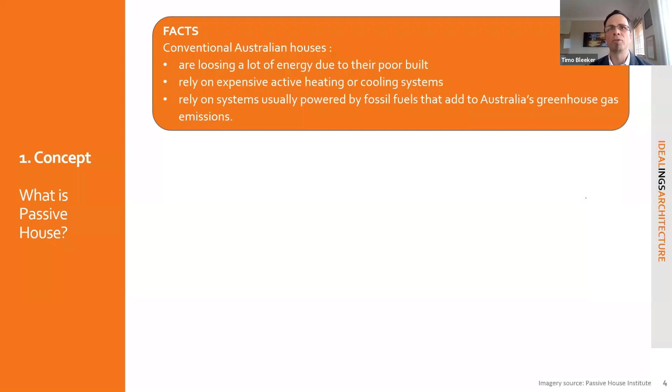Let's carry on. What is passive house? Let's have a look at some facts first. Conventional houses in Australia often lose a lot of energy due to their poor build and rely on active heating and cooling powered by fossil fuels that add to Australia's greenhouse gas emissions.

Let's have a look at the principle of a flask. A flask is a solution to keep coffee or tea warm, or any drinks that you might like, without using any active energy. A coffee machine, on the other side, needs active energy to keep the coffee warm. So passive house, you can sort of imagine it being similar. It wants to have an outer envelope that basically insulates the interior and keeps the energy that we apply to it inside without much further active energy.

I always remember the quote of a former colleague of mine I worked with for a while. He was saying, let's all live in a thermos flask and then we are all good. Not quite like that, but it's somewhat like that.

Passive house is a solution that is applicable to buildings of all classes. So it's not just class 1 residential buildings. It applies to all class 1 to 10. So you can even do your shed in the backyard, if you have a bit of a workshop there, as a passive house if you want. So it applies to everything, to schools, to hospitals, to office buildings, you name it.

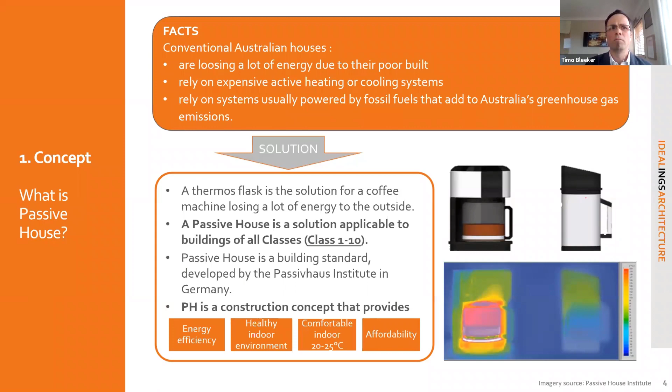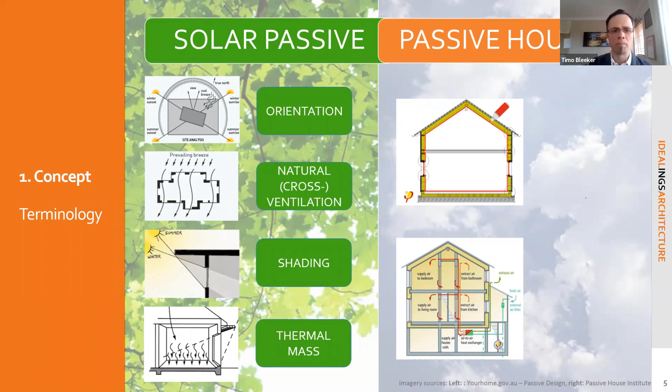Before we look further into the passive house principles, let's have a look at the terminology for a second, because there's often quite a confusion between solar passive and passive house. Solar passive has core principles to it. I'm just looking at the four main ones here, which are orientation, natural ventilation, shading, and thermal mass. Passive house does take that into consideration as well, but they lay a lot of emphasis on the building envelope and on the 24/7 fresh air supply.

You might say the natural ventilation and the fresh air might be somewhat the same. It's not quite, because natural ventilation depends on the occupant actively opening windows and doors to actually let fresh air in, or what we often find is louvers that are permanently open or operable to get fresh air in. But what about those days where it's too hot or too cold, or where we don't want that outside air to come in? That's where the fresh air supply of the passive house principles comes into play. But we look into that a little bit further down the track.

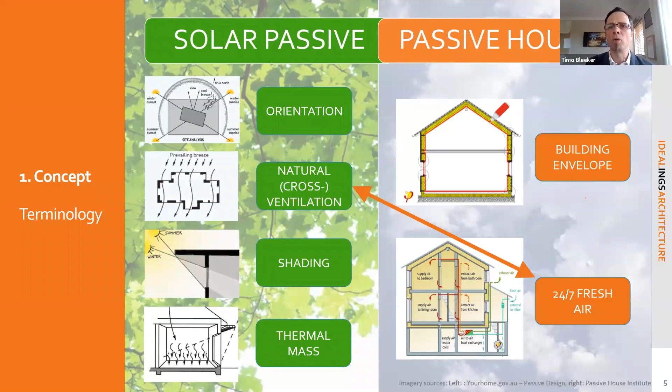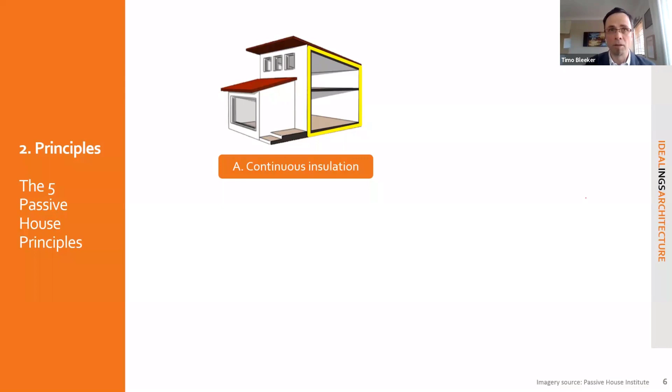The 5 principles at a glance. The first one is continuous insulation. So we need proper insulation to avoid wastage of cooling and heating energy to the ambient outside air, and it needs to be a constant layer all around. High performance windows. Windows are often the weak spot in the envelope, but we can't just treat them like holes in the wall. These windows still need to have a performing value, so we need to address that, so these windows add to the continuous insulation layer.

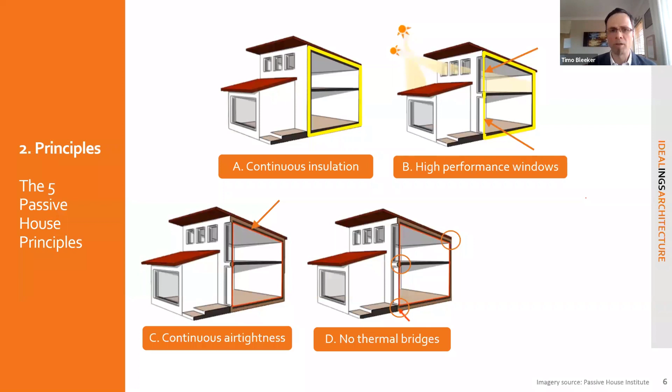Airtightness, to prevent the moisture that sits in the indoor air getting into the structure and creating damage to the building structure, and to avoid getting unwanted and uncontrolled air in from outside, so getting drafts, etc. No thermal bridges, to avoid health issues for the occupants, and avoid gaps in the outer envelope where the cold could come in and provide cold surface temperatures and condensation and mold issues.

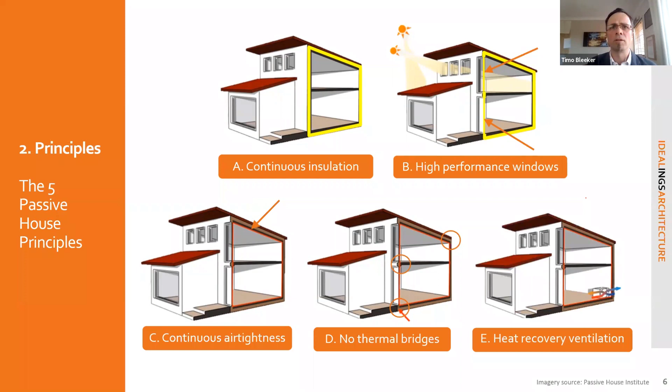And the fifth and last principle is heat recovery ventilation, which is often called the lung of the passive house. But let's look at all of those principles one by one, starting with the insulation. Some facts at the beginning.

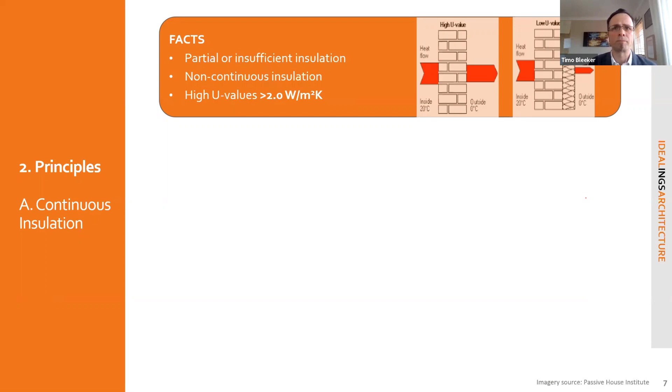So we want the insulation installed as a continuous layer, as highlighted before. So that yellow line here needs to be continuous, even in the tricky bits where the roof meets the wall or the roof cappings or at the footings, etc. So we want to look at those details that achieve a continuous layer.

With low values, U values as low as 0.3 watt per square meter Kelvin. Mind you, that's for Perth. In other cities or other locations, that might be a different value. In colder climates, sometimes underslab insulation is needed, as you can see at the yellow dotted line here, especially maybe the Melbourne and Tasmania region, certainly the northern European region. We usually have underslab insulation.

And keeping the heat in and keeping the heat out works in both directions, obviously. In winter, the insulation keeps the heat in, and in summer, it keeps the heat out where we want it. Or look at it the other way around. In summer, the air-conditioned air stays inside.

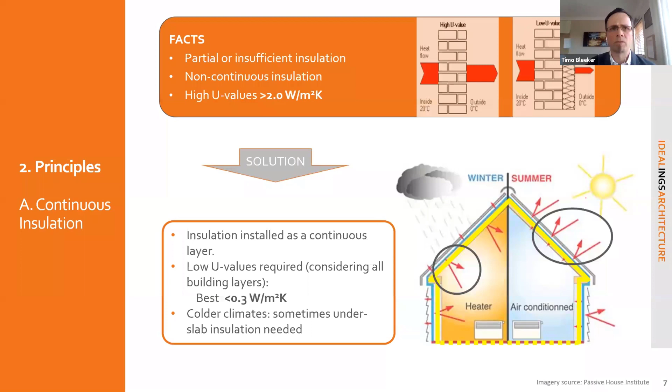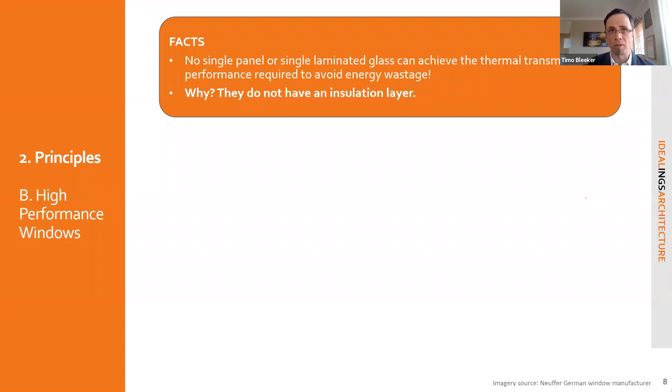The second principle is high-performing windows. So no single pane or laminated glass can achieve a thermal transmittance performance required to avoid energy wastage. Why is that? Because they don't have an insulation layer. It's basically just a pane of glass or two panes of glass that are laminated to each other that don't have an insulating capacity. The thicker the glass becomes, it might take a little bit longer for the heat to go from one side to the other side, but it's basically just a material that conducts heat.

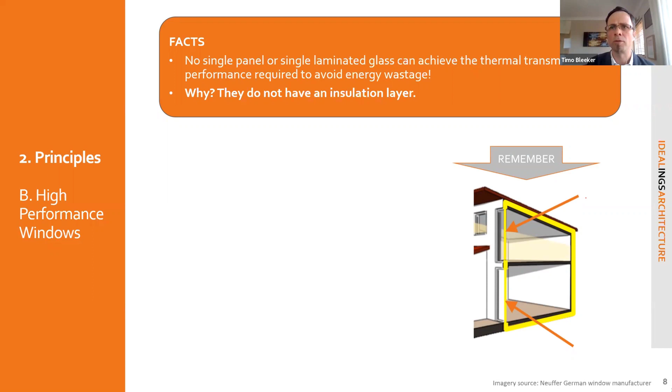Remember, we don't want those windows to just be holes in the wall. They need to have a thermal performance to close the loop of the thermal insulation. So what we want is the windows must have double glazing, because the cavity in between is the insulating bit and usually has a gas infill, and that gas has a thermal property. So that's basically the main element that thermally insulates the window or the glazing.

And these yellow and red highlighted bits basically need to be a continuation of that outer layer of the yellow line that we've seen before. It needs to meet the wall insulation at the top of the window and needs to meet the wall insulation at the bottom of the window. So with single pane glazing, this won't be achieved because there is no insulation there.

So we need that gas infill, so minimum double glazing, plus low conductivity spacers. The spacers are the ones that keep the two glass panes apart, and thermally broken frames, or even insulated frames. So all those yellow highlighted bits there are the insulated or thermally performing elements. If you've got a thermally unbroken frame, as we often find with aluminium frames, then you've got basically a thermal bridge there, where the inner surface gets really cold in winter and hot in summer, and you lose energy there.

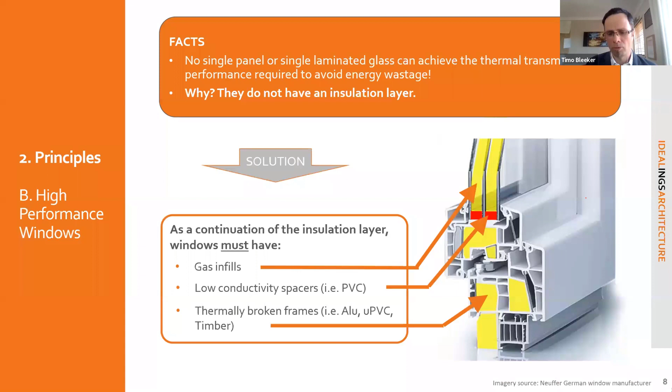Third principle, airtightness. Currently, a typical Australian home has around 15 air exchanges per hour. What does that mean? That means that every 4 minutes, the entire air volume of a building is completely exchanged. I repeat that. Every 4 minutes, the entire air volume of that building is completely exchanged, and with it, also the cooled and heated air or energy that we just applied to it.

How do we measure that? Airtightness is measured at 50 Pascal. That means there's a pressure difference that simulates a situation that is around 17 knots or 20 miles per hour. This is, just to picture it, a situation where small tree leaves or branches start to sway a little bit, or where waves on the ocean start to get those little white crests, but just the start of it. So it's a pretty common weather situation.

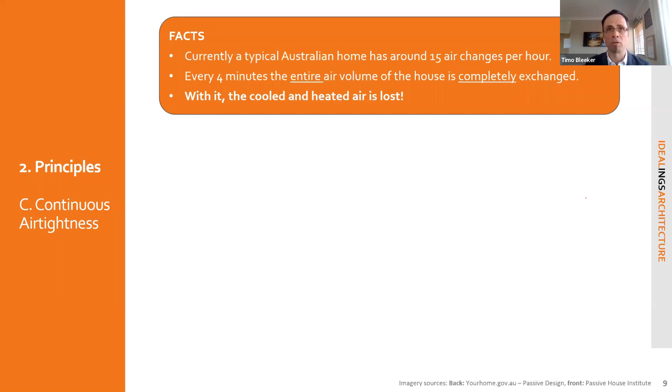Under this situation, a current typical home has 15 air exchanges per hour, so every 4 minutes. Passive House wants 0.6, so that means every 1 hour 40 minutes, the entire volume is exchanged instead of the 4 minutes that we are facing here.

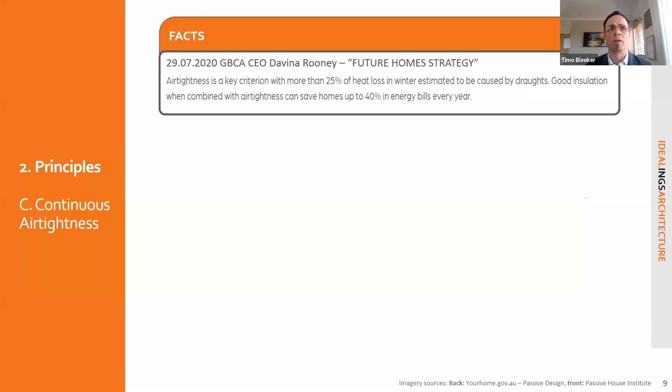Just a quick quote from Green Building Council CEO Davina Rooney. They released about two weeks ago the Future Homes Strategy, and I'd just like to quickly read that here together with you. So airtightness is the reason for 25% of heat loss, and it's estimated to be caused by draughts. So good insulation, when combined with airtightness, can save homes up to 40% in energy bills every year. I'll just leave this statement as it is for now, and come back to that home strategy a little bit later again.

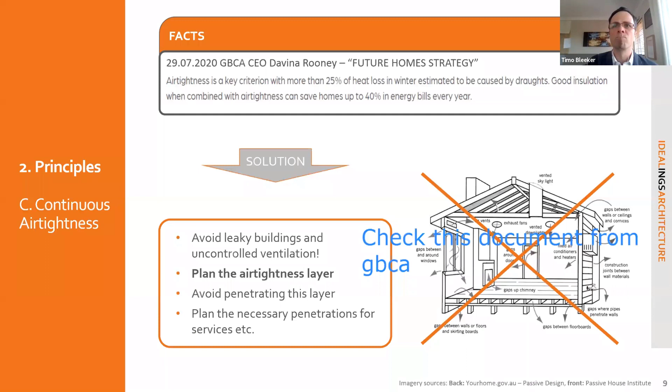So we want to avoid leaky buildings and uncontrolled ventilation, as you can see here on the right. Leaks can be everywhere, basically: around the windows, air vents, exhaust fans, your power switches, your power points, etc. So this is uncontrolled ventilation, where drafts also occur. We want to plan the airtightness layer, which you can see here in the red line, all around the building, and avoid penetrating this layer.

The airtightness layer in our local climates here, I'd say Perth, Sydney, Melbourne, Tasmania, should or must be on the inside of the insulation. In more tropical areas, it might be the other way around and needs to be looked at on a case-by-case basis. But for simplicity, let's just say it needs to be on the inside of the insulation layer. Therefore you need to avoid penetrating this layer and plan where you need to penetrate it for services, etc., or how it comes together on joint details like wall to roof or wall to floor details, etc.

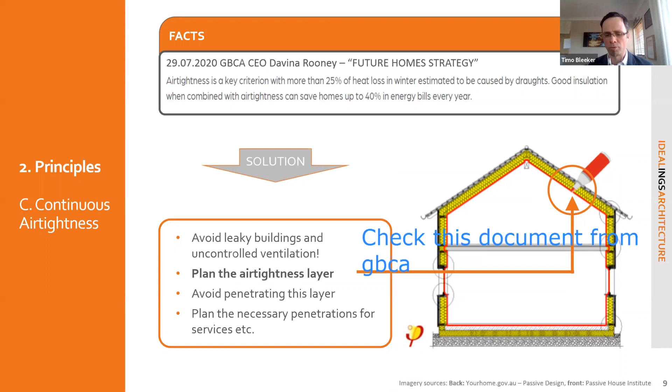The fourth principle is avoiding thermal bridges. Thermal bridges are, like windows, the weaknesses in the building envelope. They waste heating and cooling energy. They can create condensation issues and mold buildup. And these mold buildups are a health issue, so they can create allergy and asthma problems.

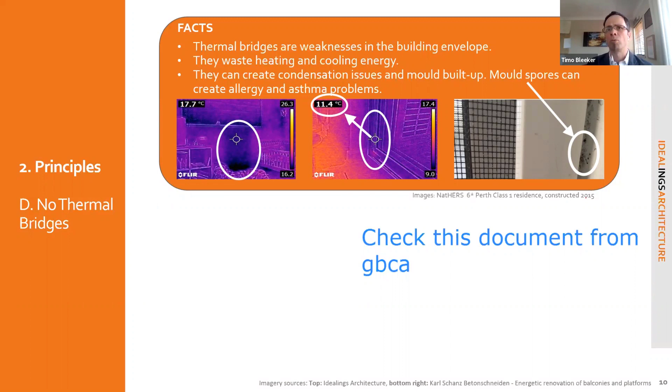The middle picture there, aluminium framing, measuring its temperature in winter time, was 11 degrees at that time. This is a situation where you get condensation for sure on the inner side. And if it gets even colder, then mold forms, as you can see on the right-hand side. It's also our house. We've got to clean that up every winter because the aluminium framing gets too cold, and the dots that you see there are not just dust, this is mold. And by the way, this is a residential class 1 building built to NatHERS 6-star requirements.

So what do we want to do? We want to avoid gaps in the thermal envelope, and we want to avoid penetrating it with highly conductive materials like steel, aluminium, concrete, and so forth. On the bottom right, you can see probably the most typical thermal bridge in suspended concrete ceiling construction, where the slab is just sticking out through the external wall and creates a huge thermal bridge where the heat can just escape.

And to the right of it, because I've got this picture from a German webpage, is a solution that often got applied in Germany: basically cutting off the slab there, applying insulation to the outside face, and installing a new self-supported balcony in front of it.

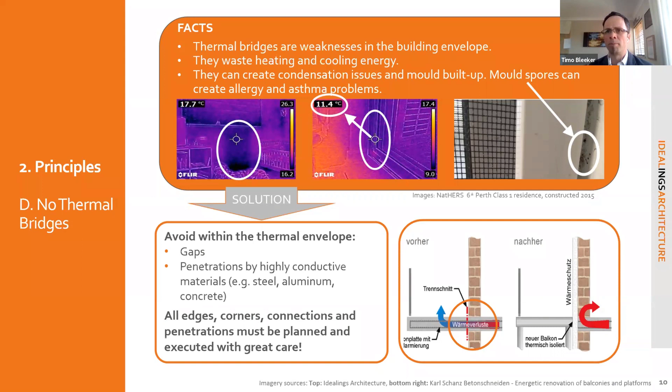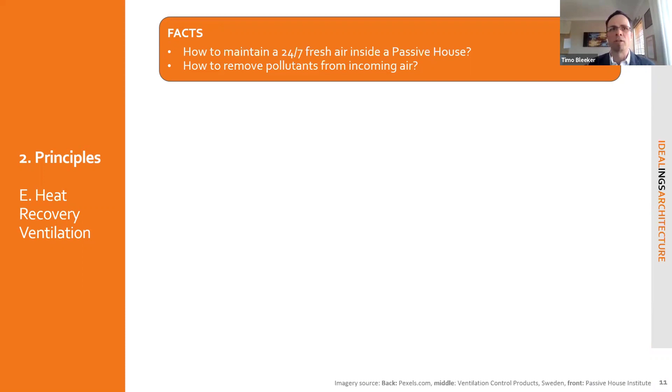Heat recovery ventilation. Now that we've applied airtightness to our building, how do we keep ventilating the building? First, I want to say heat recovery ventilation and airtightness often get misunderstood. It doesn't mean you are living in a hermetically sealed box. You can still open your windows as often and as long as you want to let fresh air in. We strongly encourage that.

But as mentioned earlier, what about the days when it's very hot or very cold outside, or situations where you don't want the windows open? Or imagine, in our busy lives, we sometimes just forget to open the windows. So we want a solution that still provides us with fresh air in those situations.

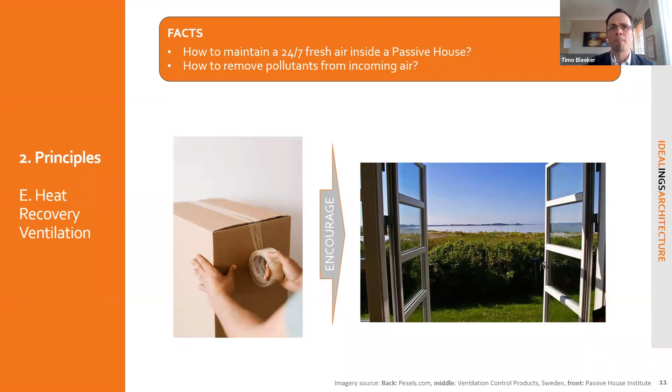I always remember a situation where I was at a presentation. It was still a face-to-face presentation, good old times, in a fairly big room with high ceilings. There were probably about 25 to 30 people. The presenter had a mobile carbon dioxide sensor, put it on the table and measured at the beginning of the presentation. It showed 400 ppm, which is pretty good, excellent air there.

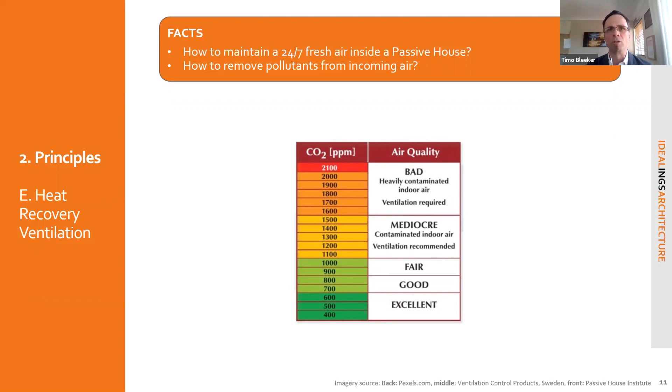Then he presented for about an hour, maybe 1.5. We looked at the sensor again after the presentation, and it showed 1800. At 1800, you can see it says bad, ventilation required. So what I want to say here is basically while we are in buildings, the CO2 values go up when we're not opening the windows or ventilating. So we need to address that. So what do we want to do?

A solution is a heat recovery ventilation system. What does that do? It supplies fresh air to primary rooms like bedrooms, living rooms, dining rooms, etc. Then it meanders through the building and warms up. Let's just imagine it's winter time, and it warms up as it meanders through the building because of cooking or computers that are on or showering, etc.

Then, excuse me, then what happens in this magic box? In this magic box, the warmer exhaust air passes the colder fresh air that comes from outside. They don't mix, they just pass each other, and they're separated by a little thin membrane. And what happens there is that the energy that is in the warm exhaust air gets transferred through the thin membrane onto the fresh air.

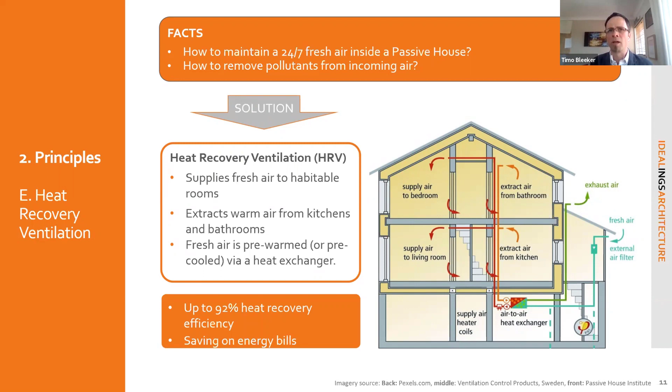So looking at the 5 passive house criteria. This little fan that draws 30 or 40 watts is within those heating and cooling demands of less than 15 kilowatt hours per square metre per annum, the requirement for passive house certification. The same applies for the cooling demand. We are looking at a frequency of overheating less than 10%. I'll get into that in a second.

And we're looking at air tightness of less than 0.6 air exchanges per hour, which means your volume of air internally gets exchanged every 1 hour 40 instead of 4 minutes, which you find nowadays quite a bit. And Passive House introduced a renewable primary energy that covers basically the remainder of the electrical usage of the building, not only the heating and cooling demand that you see on the top there, but the energy demand of the entire building you need for running your laptop, for cooking, etc. And Passive House wants to use renewable energies and steer away from gas or from fossil fuels.

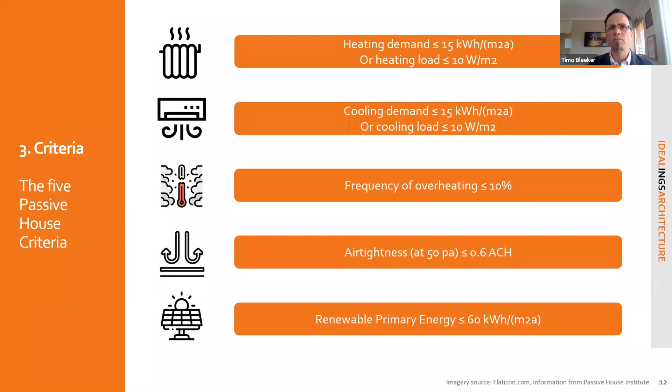Quickly back to overheating. To understand that principle a little bit better, I'm just going through a simple calculation here. There are 8,760 hours in the year, and 10% of it are 876 hours. Assuming here in Australia we might have an 8-month period in spring, summer, and autumn, we can divide that by 8 and get 110 hours per month of overheating. Dividing that by 30 days in a month, we get about 3.5 hours per day in those 8 months where the temperature would be above 25 degrees.

And remember, at the beginning we said we want to achieve an indoor comfort of around 20 to 25 degrees as a temperature range. So the frequency of overheating, where it goes above this 25 degrees, we want to keep lower than 10% to achieve Passive House certification.

Personally, I would like to have it less than 5 or even 3%. So then you would just have an hour or 1.5. When you've got 3%, maybe 1.5 hours per day in those 8 months that it's above 25.

Looking at this primary energy renewables quickly, I said that already, no fossil fuel generated energy, and this renewable energy needs to cover the building's total energy consumption, and that needs to be less than the 60 kilowatt hours per square meter per year. So you can now have a look at your personal bill and the kilowatt hours used there, and compare a little bit. It would probably be quite a bit higher, but it's achievable. We know that it's achievable.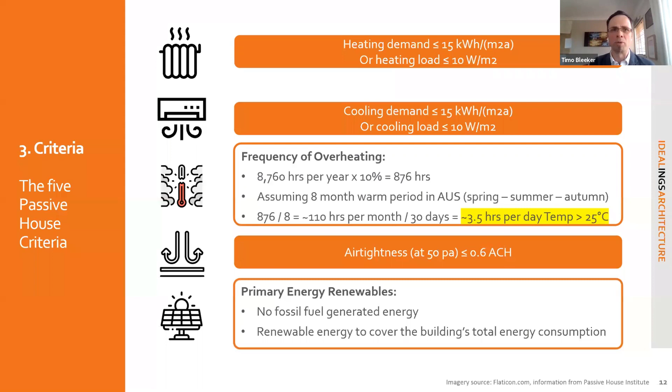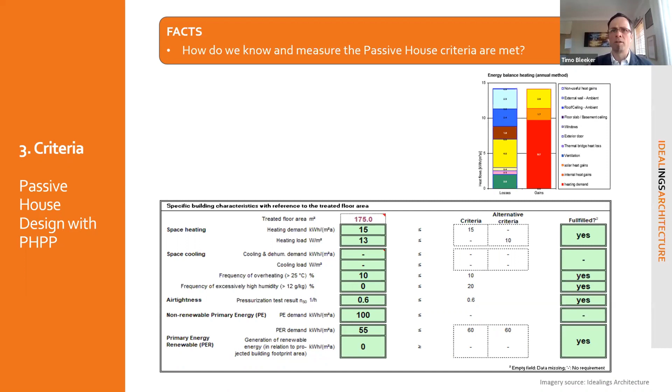Now, the Passive House Planning Package is a tool that we designers use to know and measure that the Passive House criteria are met. I don't want to dive into these numbers here. I just want to show there's a tool that shows basically where on the building you lose and gain heat, and it can show how much. So which part of the wall, which part of the window, which side, which part of the roof gains or loses how much heat through it.

And it's a modeling software developed by the Passive House Institute with aid of dynamic simulation tools. So it's based on the data pool of all the buildings they have during those last 25 years, and it's pretty accurate. So the heating and cooling demand is then basically the gap that you need to make up because of those losses that this software can show you. And when you know where the losses are, you can address them in your concept design, in your design development, by reducing, for example, window sizes, or provide more shading, or relocate some windows to a different spot to get a better performance.

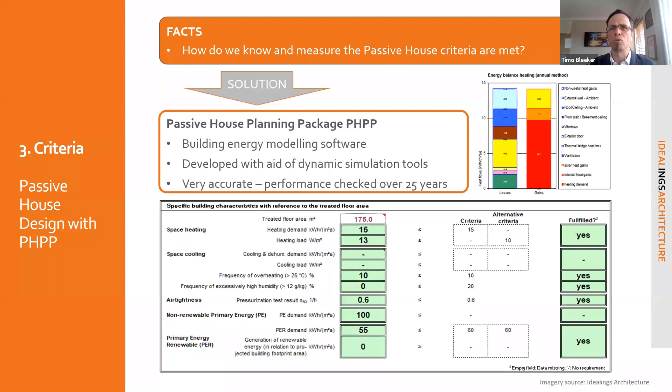Little case study on a NatHERS 6 residence here in Western Australia, class 1. It's our own building, by the way. So there are quite a few numbers. I don't want to dive into the numbers too much, but I want to explain what this means. So on the left-hand side, you see the first column, which is fairly low. That's the original design. And we're not the biggest heater or air conditioner users, so we rather put a jacket or a sweatshirt on than using our air conditioning.

But what it means is we accept any indoor temperature that comes. We measured that throughout the year. We measured anything between 13.5 and 34 degrees internal temperature. That's not comfortable. It's not healthy either. So this building doesn't have a comfortable, stable indoor temperature and indoor environment.

Now we simulated this and applied Passive House principles to it. So if we would heat and cool to get it into the Passive House temperature range of 20 to 25 degrees, we would need to apply 130 kilowatt hours per square meter a year to get it to those temperatures. And we also know, because there's only single pane glazing in here, etc., we lose it straight away. So it's just constantly running and applying a lot of kilowatt hours.

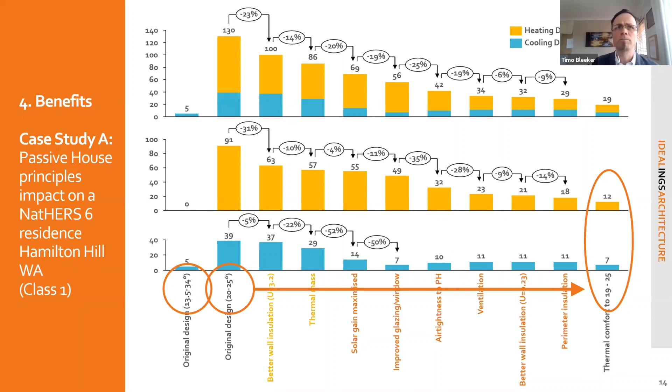Another case study that the Green Star Council has done together with the Australian Passive House Association on a Class 2 multi-residential building, I need to say 300 plus dwellings. It basically shows how much natural gas and electricity energy these dwellings use under the Green Star scheme, which is the blue and the gray columns here, in comparison to how much they would have used under the passive house scheme, which is the green line here. So you can see that it's quite a bit lower.

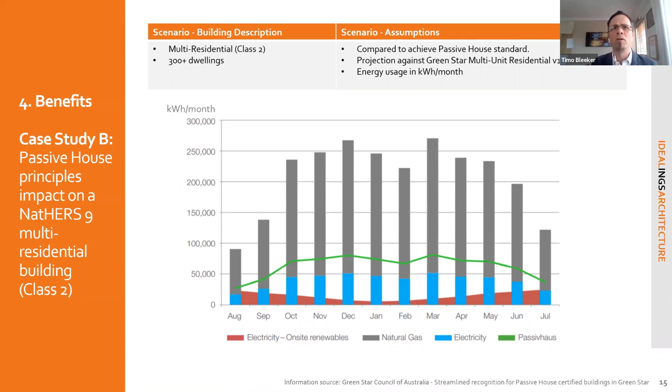I mean, the aggressive Green Star scheme is already quite sustainable. Still, the passive house principles are still a lot lower than the Green Star. Sorry. For more information, I recommend looking at these documents available on the Green Star webpage.

Now, we did a cost comparison between the passive house and the conventional house. The conventional house is Class 1 residential, built to NatHERS 6-star. And we applied a couple of parameters and assumptions to it. So to get the NatHERS 6-star building to the 20 and 25 degree comfort, we assumed 100 kilowatt hours per square meter and year of energy is needed to get it there.

And we also assumed increased project cost of about 10%, reduced heating and cooling demand for the passive house of 75%, and electricity demand of 18 kilowatt hours per square meter and year for the remainder of the energy. That's a value that the PHPP gave us. An electricity cost of 27 cents, inflation 1%, and a loan interest of 5% over 30 years, which is quite conservative, as we know, but we kept it there for now.

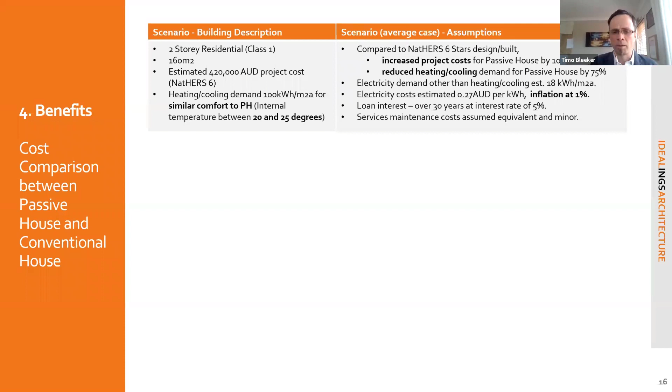Now on the left, you see the NatHERS 6-star building. On the right, you see the passive house building. Because the NatHERS 6-star building has pretty high operational costs, which is the heating and cooling in blue and the other electricity in yellow, the passive house, because of its low operational costs, but additional 10% cost, is still quite cost equivalent from day one, from the beginning.

So in the first year, for the NatHERS 6 building, you would have annual costs of, let's say, a little higher than $4,000 on heating, cooling, and other electricity. On the passive house, you might have just slightly more, maybe 4,300 or something, including that additional cost of 10%. So where do these 10% come from? I'll get into that in a second.

But what we can see here is that the passive house might not need to be that much more expensive than a NatHERS 6-star building built to rock bottom regulations, basically, just because of its low operational costs. At a stage where the loan is completed, you get that amortization point after sort of 30 years, where the passive house gets cheaper because of its low operational cost.

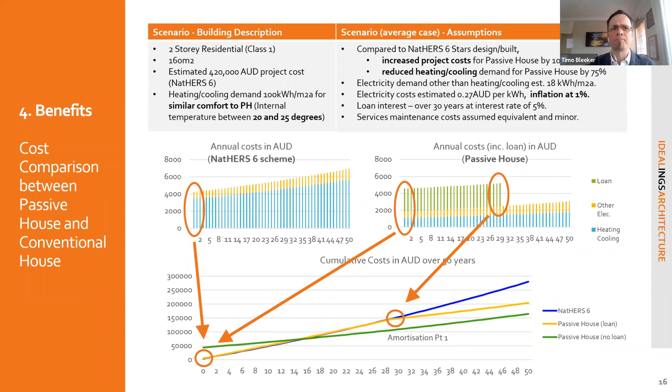Just highlighting an option here, if those additional costs can be paid up front without a loan, for some projects that might be an option, the amortization point is reached even quicker, after sort of 15, 16 years. And due to the low operational costs, that's a lot lower than the NatHERS 6-star building.

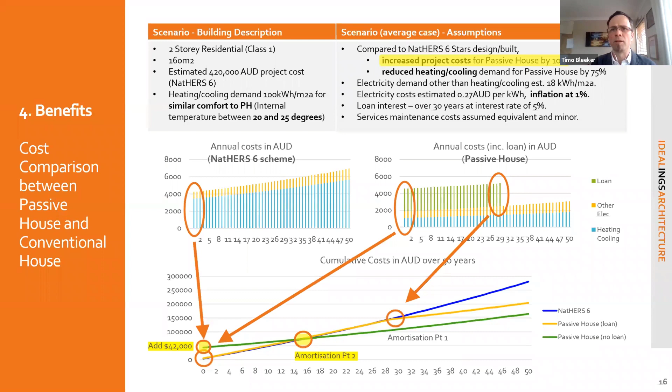So those additional costs, what are the drivers? We and other professionals have seen four main categories in drivers for those costs, which are material availability and cost, design knowledge and construction knowledge in the industry, and building design complexity. So building design complexity: the less complex the building gets, the less costly it is, which is a principle that we might all understand.

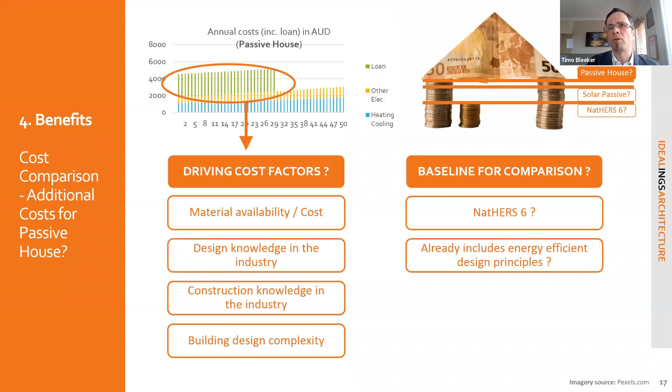But also, what's the baseline for comparison? When you compare it to NatHERS 6, yeah, there's a cost premium to it, but it's like buying a dishwasher that is rather silent. You probably pay a little cost premium compared to the standard one that's a little bit louder. But if you have a client that already considers some energy efficient design principles, let's say solar passive principles, etc., the step to passive house might not be as big anymore. So the saying that passive house is always too expensive might not be true there. The cost premium for passive house might not be as high.

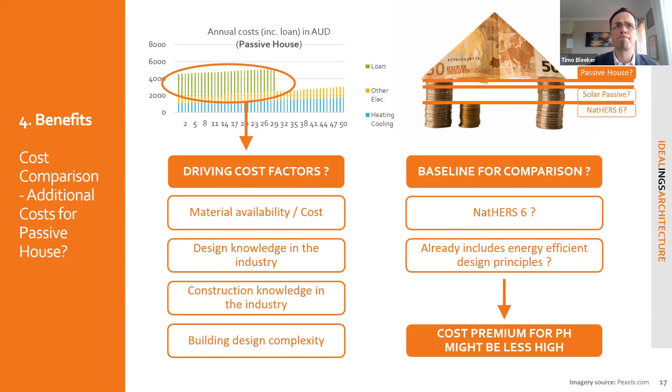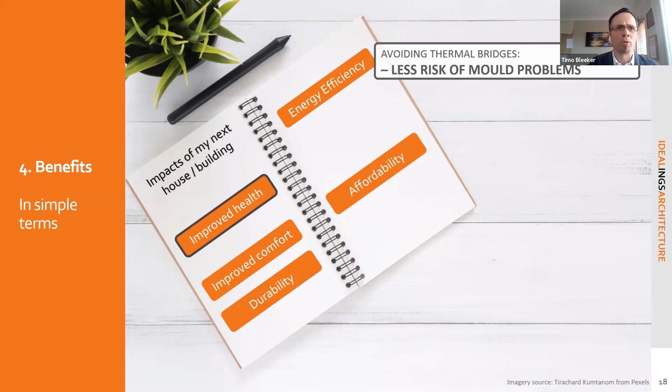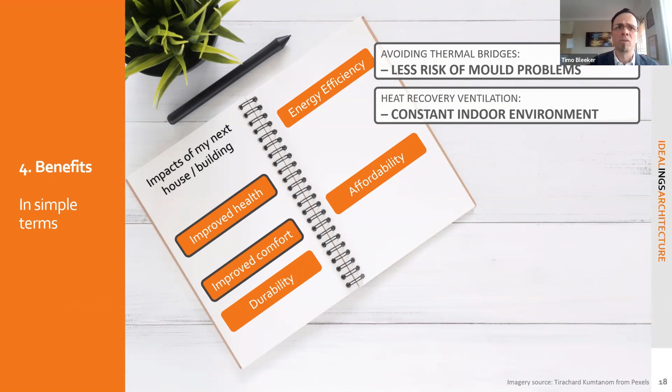So what have we learned so far? With passive house, we get improved health by avoiding thermal bridges and achieve less risk of mold problems. We achieve improved comfort through heat recovery ventilation, achieving a constant indoor environment between 20 and 25 degrees. We achieve durability through airtightness and less risk of damaged construction.

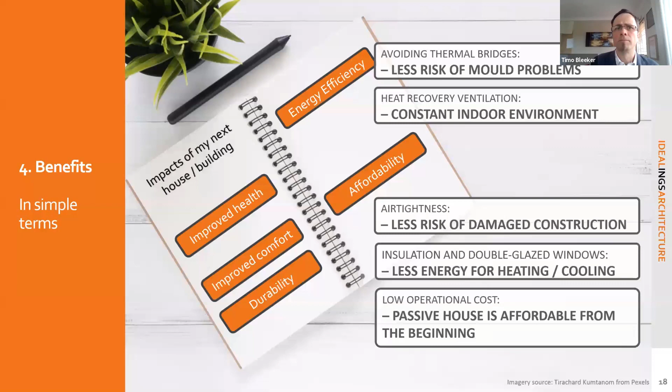We achieve energy efficiency through insulation and double glazed windows and don't waste as much heating and cooling energy anymore. And we've learned that it can be affordable because it's affordable from the beginning. Now, quickly looking at some passive houses worldwide. They mainly cluster around Europe, Northern America, East Asia, New Zealand, and now it starts here in Australia.

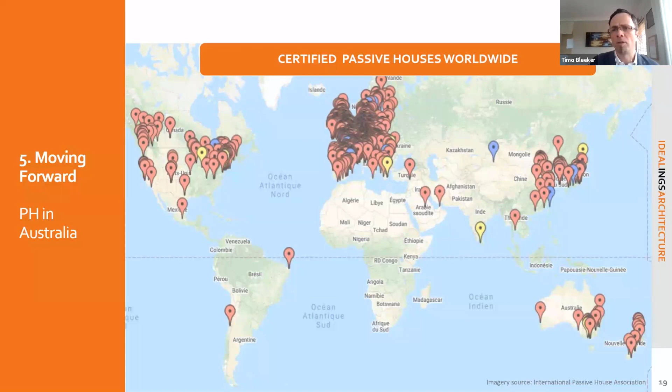But why hasn't that been picked up in Australia before? One item that we experience is the unknown. So passive house principles are basically not known amongst owners or future builders or a private person that wants to build. Misinformation, for example, about airtightness and recovery ventilation, thinking, oh, that's all a sealed box, or even getting comments like, oh, in our climate, we only need double brick and single pane glazing. That's enough insulation. We don't need more.

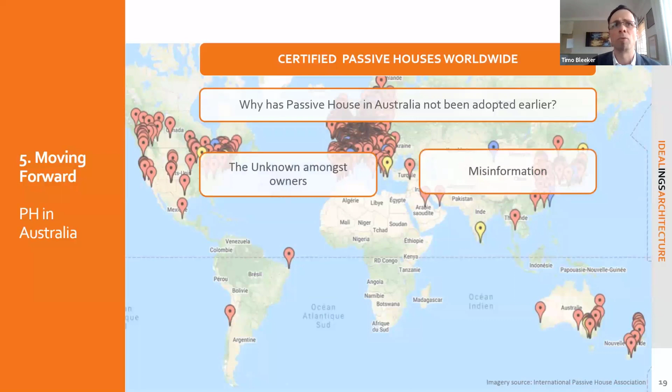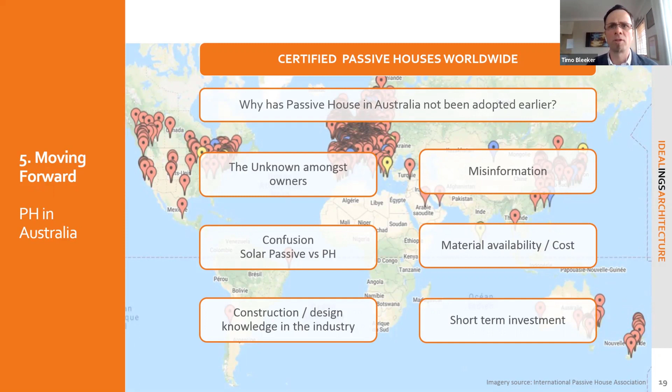Confusion about solar passive principles and passive house, as we outlined at the beginning. Material availability and cost. Construction design knowledge in the industry, and the mindset of short-term investment. So passive house is a principle where you get your benefits long-term, so if a client wants to invest in a building and then sell it after 5 or 10 years, they might not want to go through this little additional cost.

These 5 elements we tackle through some education and spread the word, and actually say, yeah, passive houses are out there, and it can be an option for you. Material availability and cost and construction knowledge have been tackled over the last 2-3 years quite well through training. And we see that the demand for energy efficient buildings is rising, and that also gets picked up by the industry, getting more affordable materials into the market.

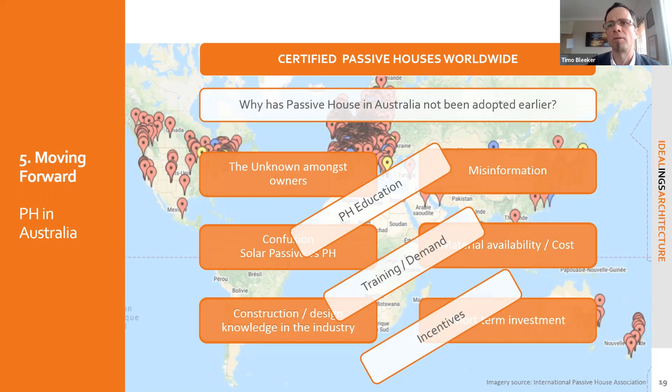Short-term investment: there's an incentive out there, for example, from Bank Australia, lowering interest rates for energy efficient buildings. So that could be something to tackle the mindset. So how can professionals assist in getting a passive house done? Certainly a certified passive house designer needs to assist and do the assessment and the advisory. Certified passive house trades are recommended; consider builders with certified staff. It makes it easier on site and more cost efficient to actually build the house.

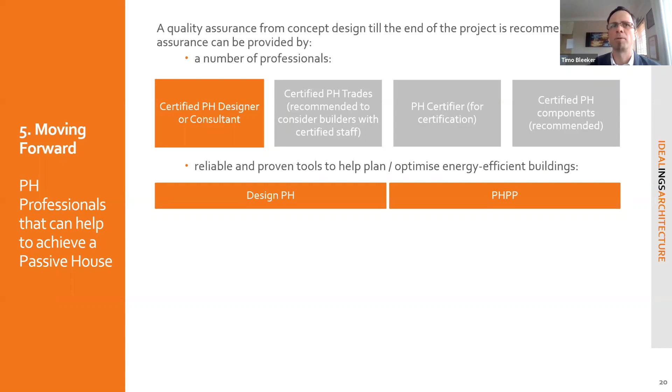If you want to go for certification, a passive house certifier is needed to assess the design, and obviously the materials and certified components are required. Reliable and proven tools help to plan and optimize this, which is the Passive House Planning Package, PHPP, and the related design PH modeling tool. And we as Idealings Architecture provide those services. Standard architectural design services from concept design to contract administration.

We do passive house consultancy when there's an existing design that architects might have. We can assist and advise on passive house principles. We do the PHPP. We can advise on acknowledging the passive house principles in the Green Star scheme. We do airtightness testing, HRV commissioning, and education such as presentations like this. Let's have a look at the passive house consultancy for a second.

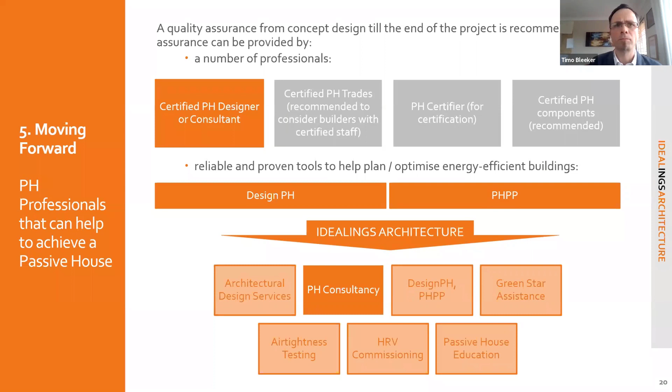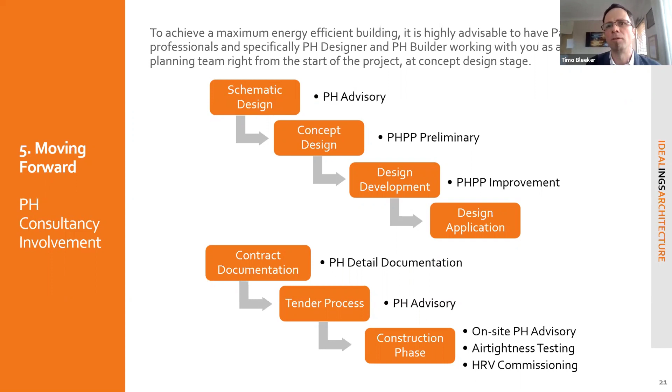To achieve a maximum energy efficient building, we recommend getting advisory and a passive house planning package done early in the design phase to avoid replanning things later on, because it can have quite a substantial effect on the design when you need or want to move windows or add some shading elements, etc. So you certainly want to include a passive house professional before a design goes to a DA application. Further, we can assist in the contract documentation and the tender process, and even do some advisory on site to builders that are not yet knowledgeable in passive house construction.

I want to finish the presentation with 2 slides of the Green Building Council doing a partnership with the Australian Passive House Association. Because by following the passive house principles, 30 points get acknowledged in the Green Star scheme. That is almost 1/3 of all available 100 points, and it's 2/3 of the minimum 45 points you need for the 4-star rating. So while following the passive house principles, a lot of Green Star boxes already get ticked.

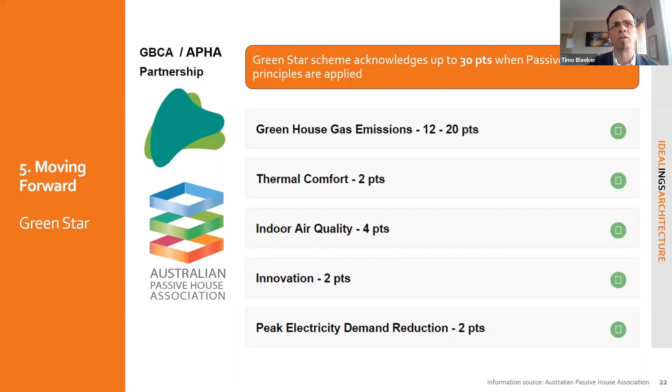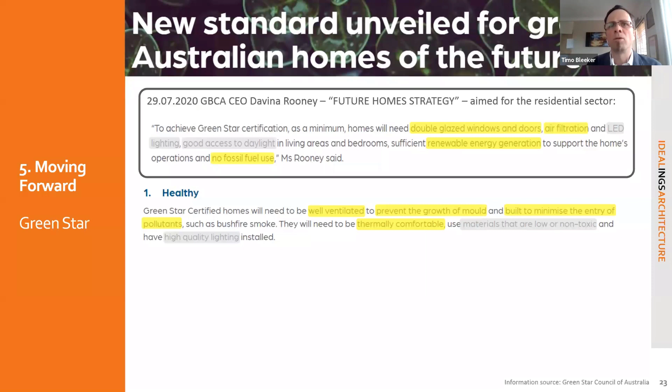This future home strategy, and I highlighted in yellow the bits that Passive House already provides. So that again ticks quite a few boxes there already. The future home strategy outlines a couple of core elements, which is healthiness. The buildings under the Green Star scheme need to be well ventilated, prevent the growth of mold, built to minimize the entry of pollutants, and need to be thermally comfortable. The materials need to be low and non-toxic, with high quality lighting.

The buildings need to be resilient and use 40% less water, and they need to have a positive contribution to the environment. Buildings need to be built to generate sufficient renewable energy to power all estimated regulated loads, as well as estimated appliances and plug loads. Basically, use renewable energies for your energy usages. They do not use gas. They need to be minimum 4-star energy rated, battery ready, and they need to have double glazing. Again, all those yellow highlighted items are in the box following the Passive House, basically.

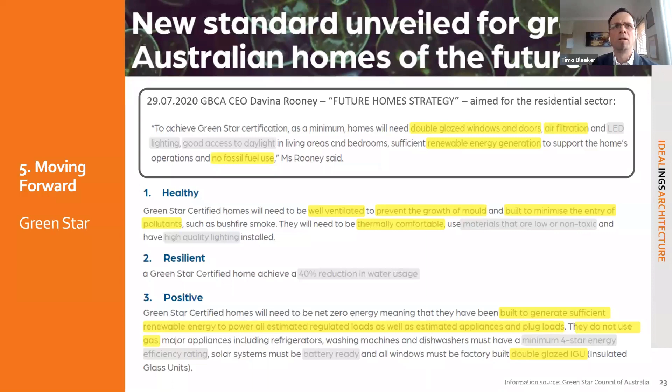Thank you, Timo Bleeker, for that. We have had a lot of questions, and I'm conscious that we're not going to be able to get through all of them. I'm really sorry to say that. But a lot of people have asked me questions in the lead up to the event, and a number of questions have come in from members that are based overseas and also in tropical areas.

Now, we know that places like Brisbane, where it doesn't get too hot and it doesn't get too cold for most of the year, maybe the cost ratio may not warrant the payback in saved energy for passive houses, and there may not be that appetite there. But we know that different climatic locations require different priorities for passive design. So how do you balance or prioritize against the extremes, those 2-week heat waves versus a 3-week freeze effectively? What's your thoughts on that?

When addressing the outer envelope of the building, you basically separate the indoor environment from the outdoor environment. So if you have a 40-degree heat wave outside, or you have 0 degrees outside, it doesn't matter too much to the indoor comfort of the building, because the outer envelope addresses that climate. So the insulation is thick enough, or the entire wall build-up, and the windows provide that performance to keep the indoor environment at 20 to 25 degrees and relative humidity, no matter what the outer climate is.